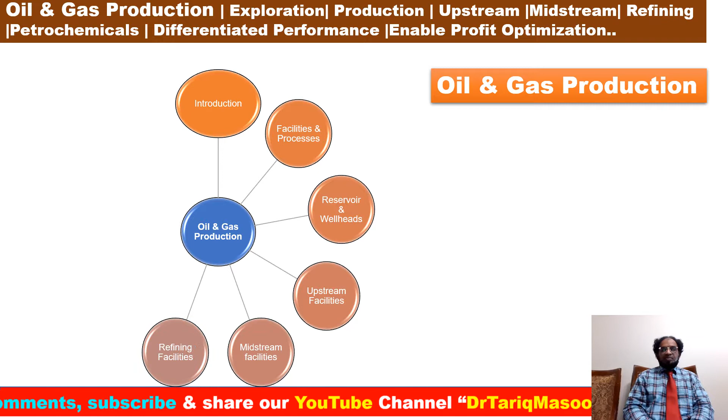So, oil and gas productions: introductions, facilities, process, reservoir and wellhead, upstream facilities, midstream, refining, petrochemical, utility systems, unconventional and conventional resources, and environmental effects.

What is the ultimate goal? We have planned to deliver shaping the clean and sustainable global energy, and plan to deliver 300 lectures, more than 300 lectures, in the next couple of years.

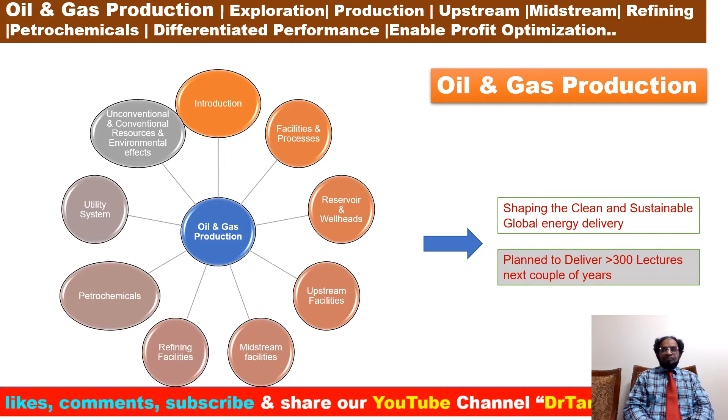Oil and gas productions, the midstream facilities, lecture number 21: LNG.

Key takeaway points, lecture number 21: Facilities, process, onshore, offshore, LNG process, LNG liquefaction methods - ConocoPhillips, SMR, PRICO, C3MR, Shell DMR dual mixed refrigerant, and Linde.

So today we are going to discuss this.

LNG process operations. LNG is a gas transport product. The gas, which is primarily methane CH4, is converted to liquid form for ease of storage or transport, as its volume is about 1/600th the volume of natural gas in the gaseous state.

It is produced close to the production facilities in an LNG liquefaction plant, stored and transported in cryogenic tanks on LNG carriers, and delivered to an LNG regasification terminal for storage and delivery to the pipeline system. LNG carriers are used when the transport distance does not justify the cost of the pipeline.

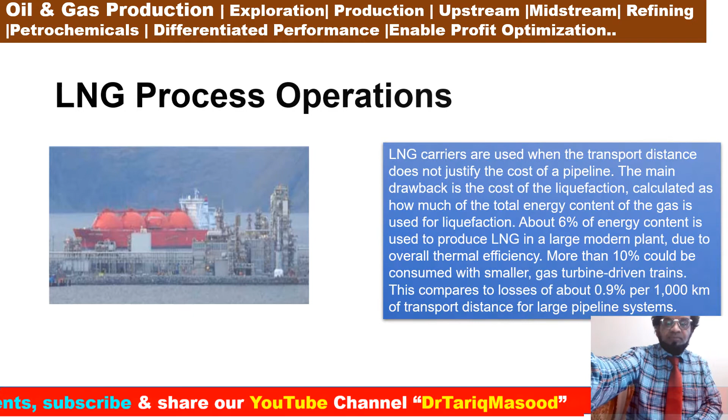This comes from a gas plant as outlined; it must satisfy a sales gas specification. Ethane, propane and butane all have freezing points of less than minus 180 degrees C and can be part of the LNG, but the concentration of methane is generally above 90%. Some NGLs are also needed as a refrigerant for the cryogenic process.

Now, LNG liquefaction - how does it happen? LNG processes are generally patented by large engineering oil and gas companies, but are generally based on a 1, 2, or 3 stage cooling process with pure or mixed refrigerants. The three main process types of LNG process, with some example process licensors, are: first, a cascade cycle; second, a mixed refrigerant cycle; third, an expander cycle.

The first, cascade cycle, is a separate refrigerant cycle with propane, ethylene and methane, introduced by ConocoPhillips. Second is a mixed refrigerant cycle: first, a single mixed refrigerant SMR, PRICO, single mixed refrigerant LIMUM, Linde; third, a propane pre-cooled mixed refrigerant C3MR, sometimes referred to as APCI, Air Products and Chemicals; and fourth, a Shell dual mixed refrigerant process called DMR Shell.

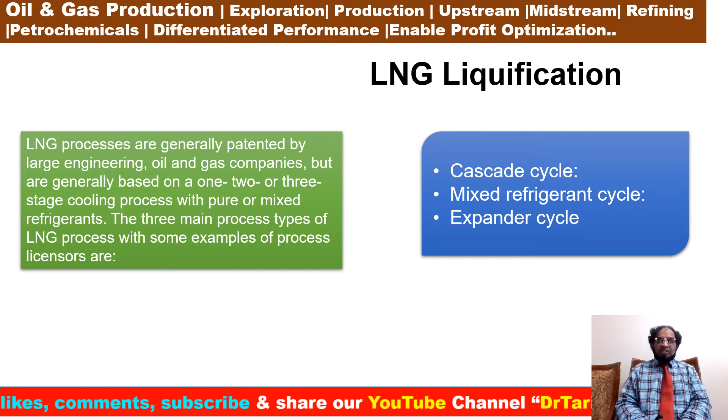Each process has different characteristics in scalability, investment cost and energy efficiency. For smaller installations, to handle stranded gas or associated small gas fields, a single cycle process is preferable due to its low capex and possibly lower weight for floating LNG, even if energy efficiency is significantly lower than the gas cascade or DMR process, which costs more but also allows larger trains, typically 7-8 million tons per annum, and lowest energy consumption per unit of LNG produced.

Mixed refrigerant design: most processes are a mixed refrigerant design. The reason is that the gas has a heat load to temperature, Q over T, curve that, if closely matched by the refrigerant, will improve stability, throughput and efficiency.

If you can see in the picture, the curves tend to show three distinct regions matching the pre-cooling, liquefaction and subcooling stages of the refrigerant gas: subcooling, liquefaction and pre-cooling.

The refrigerant gas composition will vary based on the individual design as well as the power requirement for each stage, and is often a patented, location-specific combination of one or two main components with several smaller ones, together with careful selection of the compressed and expanded pressure of the refrigerant to match the LNG stream.

Typical LNG train power uses about 28 megawatts per million tons of LNG per annum (MTPA), corresponding to a typical 200 megawatts for a large train of 7.2 MTPA, or 65 megawatts per stage for the 3 cycles.

In addition, other consumers in the gas treatment and pre-compression add to the power consumption, bringing the sum to 35 to 40 megawatts per MTPA, and over 50 for small LNG facilities well under 1 MTPA capacity. Some examples are given as we can see here.

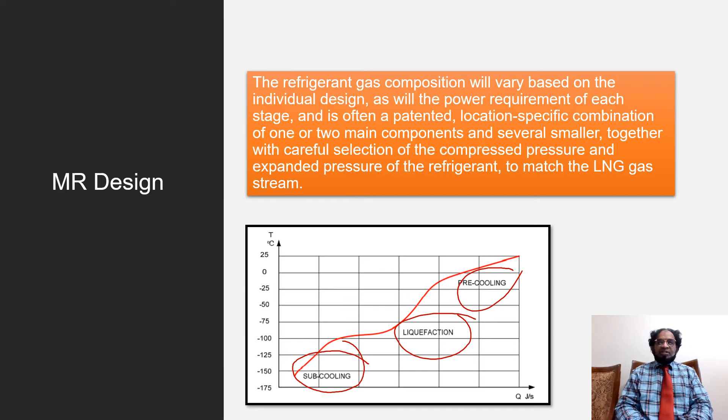Triple cycle mixed refrigerant cascade: a triple cycle mixed refrigerant cascade claims to have the highest energy efficiency. It is represented by the Linde design, co-developed with Statoil. The actual design varies considerably with different processes.

The most critical component is the heat exchangers, also called the cold box, which is designed for optimum cooling efficiency. Designs may use separate cold boxes, or 2 or 3 cycles may combine into one complex common heat exchanger. This particular design uses the patented coiled wound heat exchangers, also called the rocket design, due to its exterior resemblance to the classic launch vehicle.

For each train, the cooling medium is first passed through its cooling compressors, since pressure times volume over temperature, PV over T, remains a constant. This results in a significant temperature rise, which has to be dissipated, typically in seawater heat exchangers. So it demonstrates where we are.

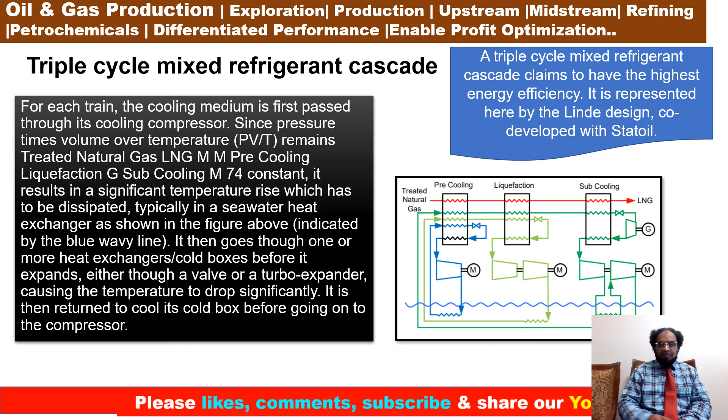It then goes through one or more heat exchangers, or cold boxes, before it expands, either through valves or the turbo expander, causing the temperature to drop significantly. It is then returned to the cold box before going onto the compressor. Next, we will discuss the pre-cooling, liquefaction and subcooling stages as demonstrated here: pre-cooling, liquefaction and subcooling.

Pre-cooling, liquefaction, subcooling. The pre-cooling stage cools the gas to a temperature of about -30 to -50 degrees Celsius. In the pre-cooling or cold box, the cooling elements are generally propane or mixtures of propane and ethane and small quantities of other gases. The pre-cooling or cold box also cools the cooling medium for the liquefaction and subcooling stages.

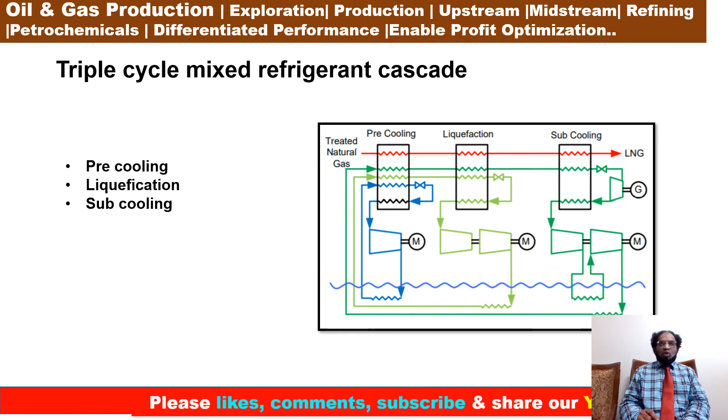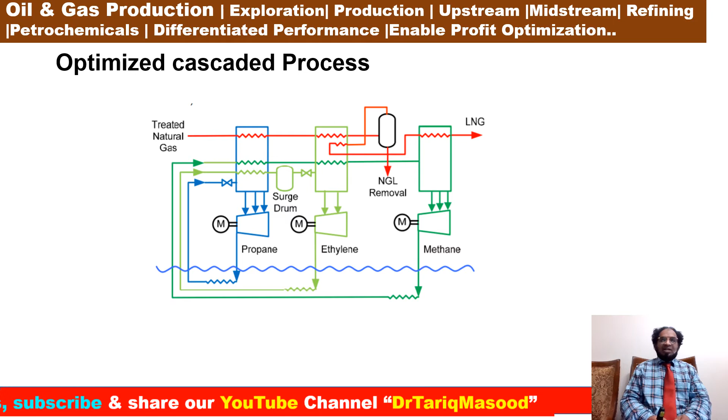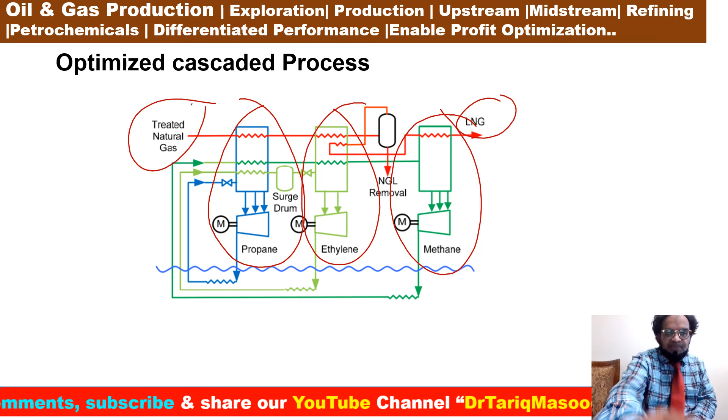In my next slide, Shell DMR and APCI C3MR design. The dual mixed refrigerant, that's DMR, developed by Shell and others, may look similar but they differ as per the requirements, as multi-stage compressors are typically needed. On my right hand side is the C3MR, and this is my DMR, a dual mixed refrigerant design. As we discussed earlier, it is more efficient compared to other designs.

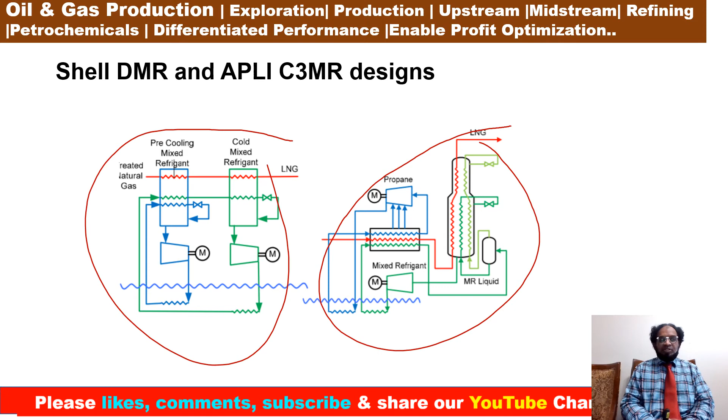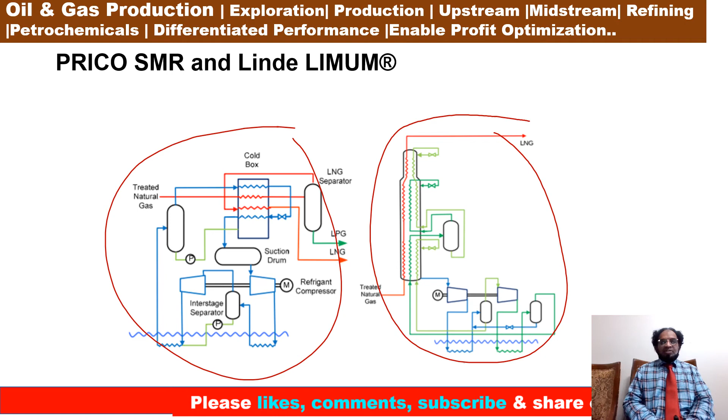Now we are going to discuss SMR and LIMUM. For small and micro LNG, single cycle designs are often preferred. There are literally hundreds of patent solutions, but only a handful of the mainline licensees have solved the challenge of achieving single cycle refrigeration. However, this means multiple internal stages in the process flow and the heat exchangers themselves. The PRICO SMR, on my left hand side here, and the other is Linde LIMUM, on my right hand side, provide a solution for a smaller or single cycle design for refrigeration purposes.

Storage, export and regasification. Storage at the terminal and on the LNG carrier is done in cryogenic tanks at atmospheric pressure or slightly above, up to 125 kilopascal. The tanks are insulated but will not keep LNG cold enough to avoid evaporation.

Heat leakage will heat and boil off the LNG. Therefore, LNG is stored as a boiling cryogen, meaning the liquid is stored at its boiling point for its storage pressure - at atmospheric pressure, that is about -162 degrees C. As the vapor boils off, heat of vaporization is absorbed, which cools the remaining liquid. This effect is called auto-refrigeration. With efficient insulation, only a relatively small amount of boil off is necessary to maintain the temperature.

Boil off gas from the land-based LNG storage tank is compressed and fed to the natural gas pipeline network, or on the LNG carrier the boil off gas can be used for fuel purposes. So here we demonstrate the LNG terminal process overview.

At the receiving terminal, LNG is stored in a local cryogenic tank. It is regasified to ambient temperature on demand, commonly in seawater heat exchangers, and then injected into the gas pipeline system.

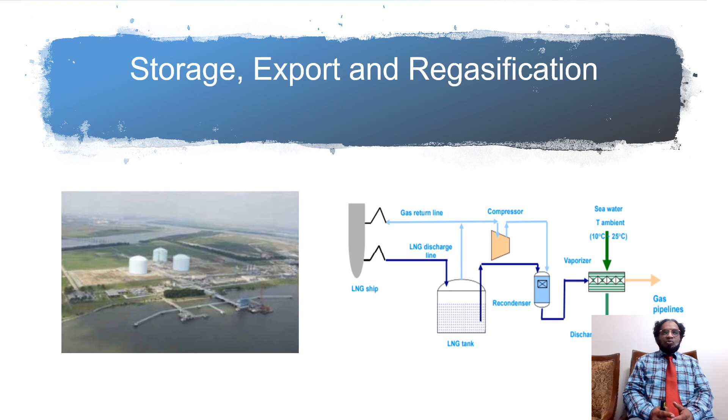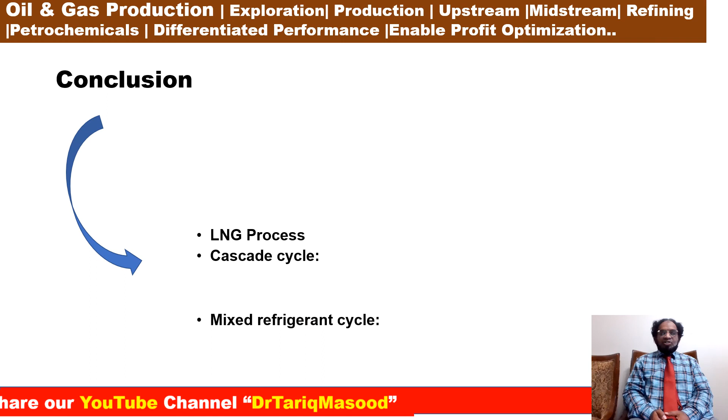Conclusion. Today we have discussed the LNG process, cascaded cycles, mixed refrigerant cycle, and expander cycle.